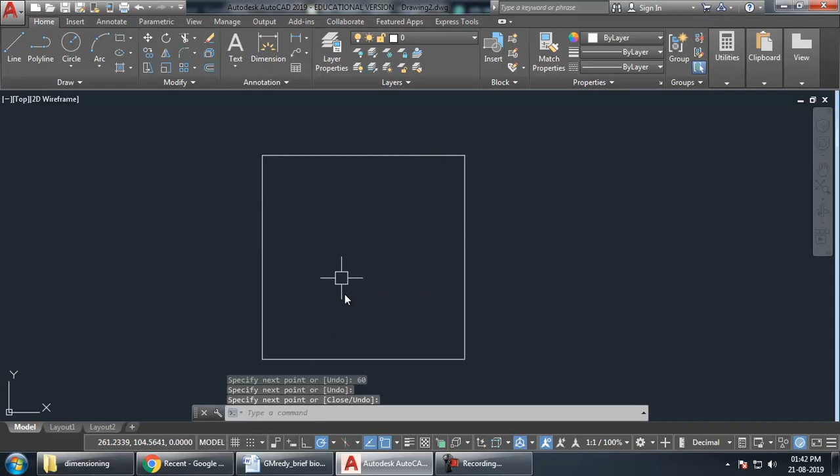I can create multiple copies of this if we want. So now we want to start creating this.

The gap for these lines has been set as 6. So we have to take an offset of 6 - O enter, 6 enter - and then click the line and choose which side of that line you want the offset. So I've clicked the line and I'm clicking this side.

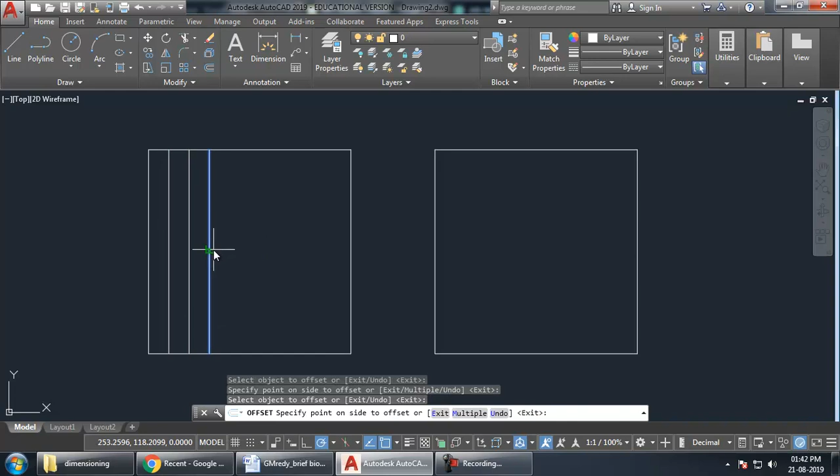Continue doing the same thing until the whole box is completely filled with lines. Do the same for horizontal lines, until the whole box is completely filled. So now we have overall 10 by 10 boxes.

Now we need to delete a few of the lines. We have to start the deletion here. In order to delete, you give the trim command, which is TR, double enter, and then start deleting, alternating.

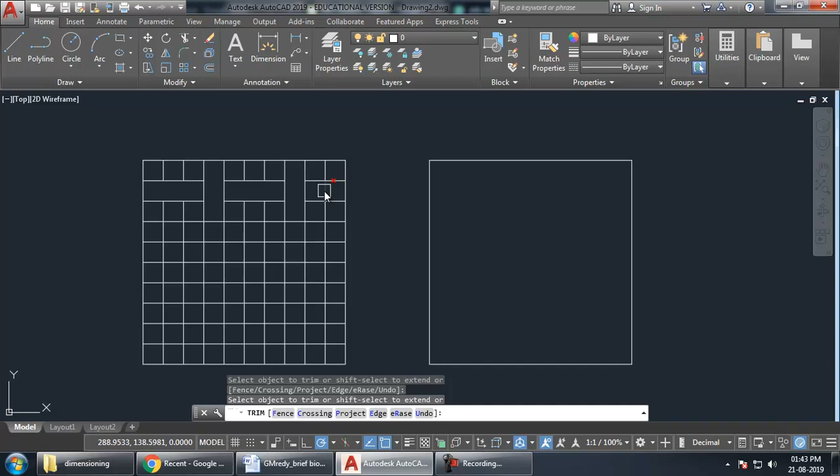In case you make a mistake in between somewhere, you can always press U enter, which will undo the previous command. Go on doing the same below here - this is supposed to go up, this is going down, again up, again down. So next up here, okay, undo.

This is supposed to come up, this is going down. You have to continue doing the same thing - it's going below this, again it will come above, and it will go below. Then here it will come this way, then it has to come above, and then again it will go below.

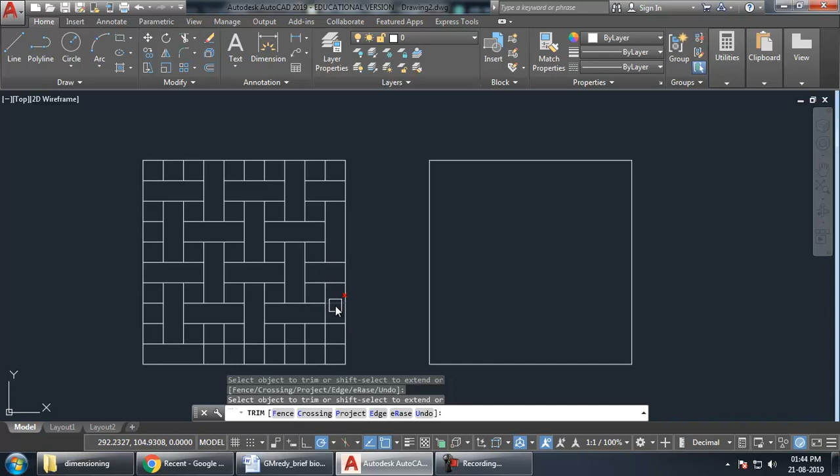Now you can see the pattern starting to come out. Here we're supposed to put it down, and here it will go down. Here this will go away, and here this is down. This is up, this is down. Finally here this will go down. So this appears like a number of threads running, interconnected with each other.

This diagram we have completed. Here in this diagram there's a small mistake - these two lines the person forgot to trim out, so we've done that as well here.

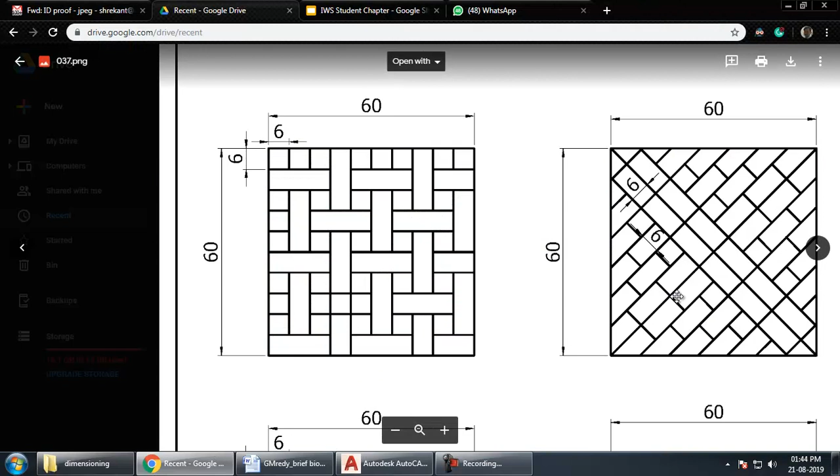Coming to the next diagram, we have something like this. In order to do this, we'll first join the diagonals - this diagonal over with this, and this one over to this.

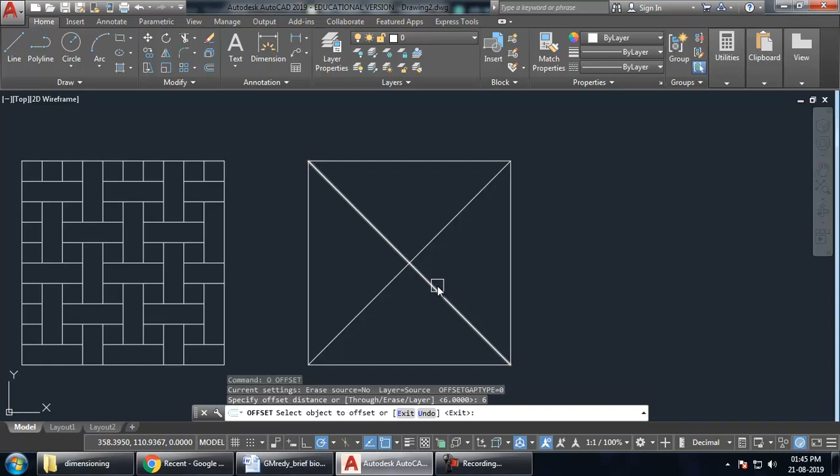Now we know the offset values - they're again set to 6. So give offset, O enter, 6 enter, and go on providing the offsets. You have to provide the offsets on both sides, same as the previous case.

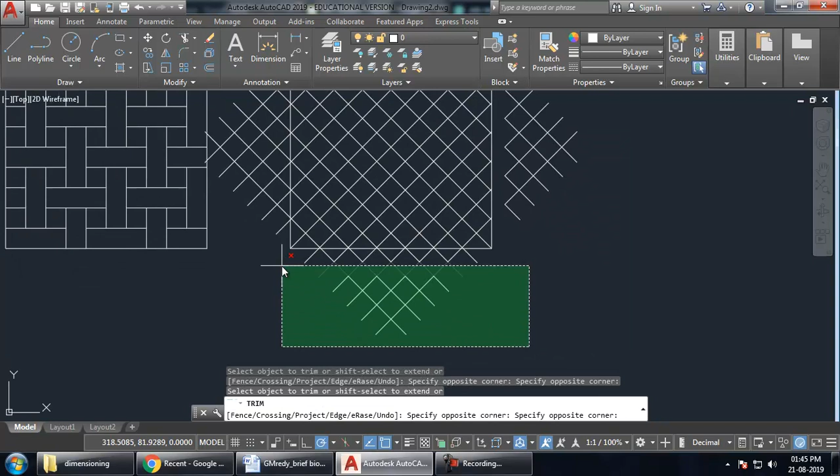You can zoom in a little if it's not working out properly, if you're unable to select the lines properly. Then go for the trim command, which is TR double enter, and trim it like this. Trim out all these lines right here, and extra lines you can just delete or erase directly.

So now we are set - we've got all these boxes completely filled. Now we need to trim them. While trimming, you can see along this dimension, along this diagonal, we're supposed to have two boxes.

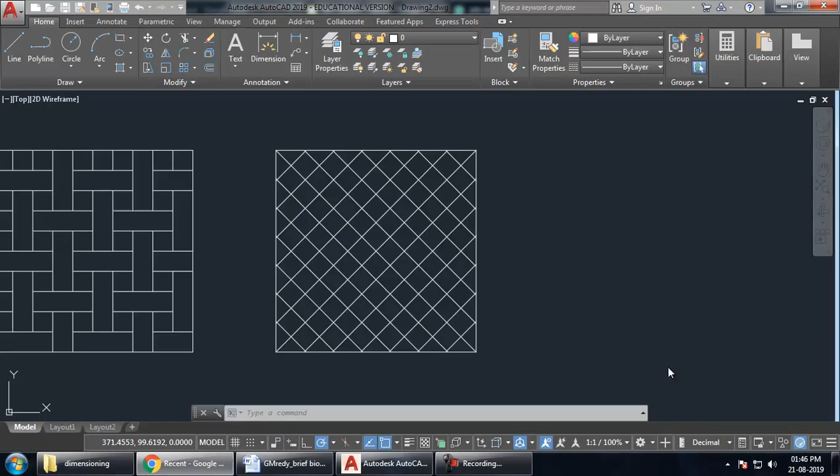Starting here, TR double enter, I'm supposed to have two boxes. Just trim the alternate lines over here. Okay, so the middle diagonal is ready for us now.

Now starting here on this side, we have to trim it like this - trim this line first. You can see this is a square, so we'll leave the square and trim the next one. Starting here, we'll trim this and this both, then here leave the square and trim it. So like this, alternate lines we'll have to trim away.

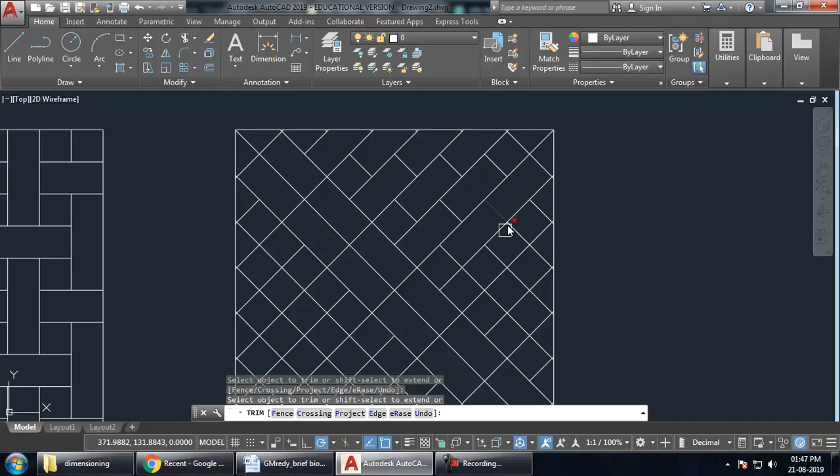So alternate lines we'll have to trim off. Yeah, so we got this side ready. The same thing we have to do at the bottom side - here you can see this is completely trimmed off, so here we have to trim it off.

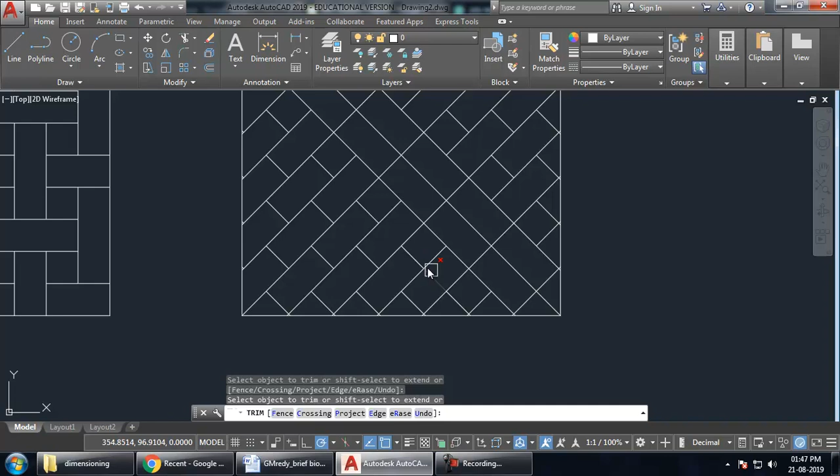And then we'll have to trim this, then this one, then this one. Just look at the previous line, and wherever it's continuing, trim that off - that will be sufficient. This line is continuing over here, so trim that off, trim this off. This line is continuing, this line is continuing. Okay, that's it.

So we got both the diagrams completed. This is how we are able to draw these particular diagrams. Thank you.